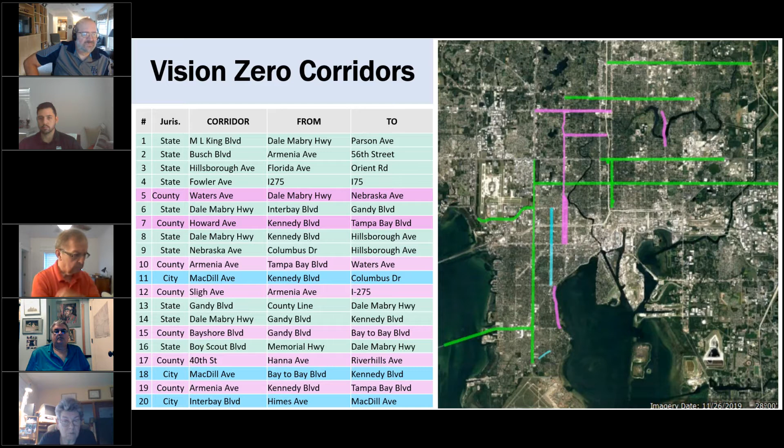Another very important element of pedestrian and bicycle safety we are committing to is a goal of maximum 35 miles per hour on all streets in the city that are not limited access. So with the exception of Interstate 275, Veterans Expressway, and the Selmon, our goal is for every single road to be 35 miles or less. There are not that many of them left because we've been chipping away at them over the years, but that is something we're going to be working towards with the state and the county through incremental changes over time, and also with major projects that will reinforce lower speeds.

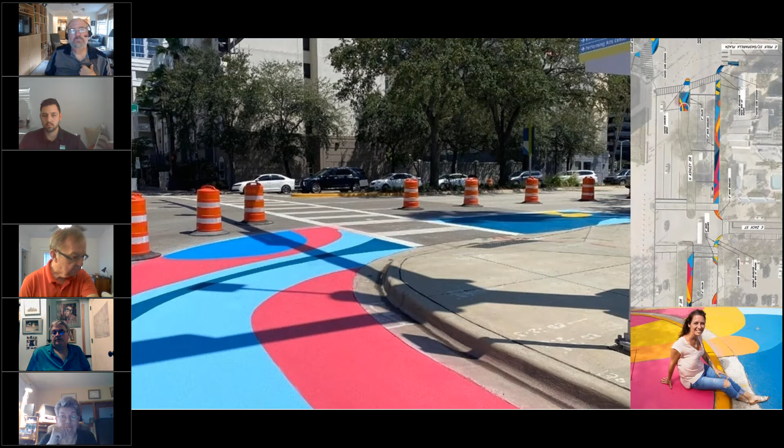For those of you that have been downtown lately, you probably have seen that last week we wrapped up some of the final touches on the painted bulb out project along Ashley Drive. This went all the way from Jackson to Tyler. Unlike a lot of our other art in the right-of-way projects, the premise behind this project was introducing color and texture in the areas where vehicles are not supposed to go. These areas are going to be bounded off by temporary or flexible post delineators to help reinforce the narrowing of the actual roadway space and encourage people to drive more slowly and more cautiously. So this is just a snippet of it, and that's the artist - she's a local downtown artist who came up with the schematic for this.

And of course, our Crosswalks to Classrooms program - 5 locations were implemented and 4 more are planned for this year. A total of 13 painted intersections have been completed, plus the painted curb extensions on Ashley, as well as some other innovative art in the right-of-way projects that we're working on here in the next couple of years.

Another strategy that we've expanded the use of is all-way stop control. We have been very reluctant to do this in the past, but that has now changed. We know that converting 2-way stop control intersections to 4-way stop control intersections can reduce crashes by nearly 70%. So this is going to become a very important Vision Zero tool for us. We already have a 6-month backlog of requests for field review and study to make sure that we're still meeting MUTCD requirements, but this is something you'll see popping up more and more throughout the city.

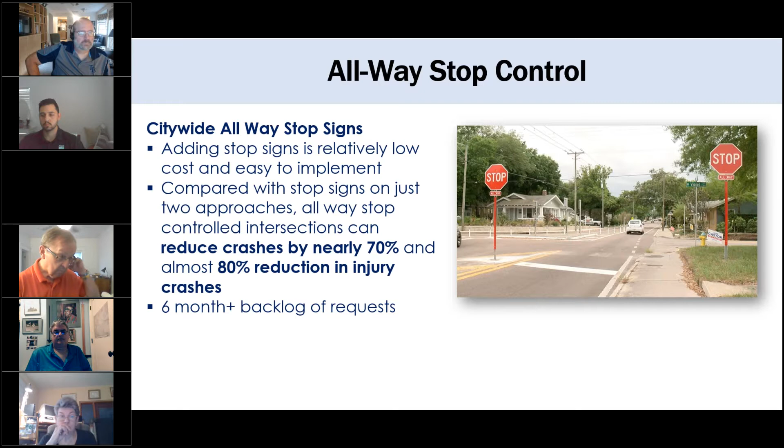And then just a quick snapshot of where we've been. A lot of what the city's been doing in the past has actually been very, very good. We have pursued systematically Vision Zero projects, safety projects on the top crash corridors that the city controls. That's why on that list I showed you earlier, there really are not a lot of city streets left that have not been completely redesigned.

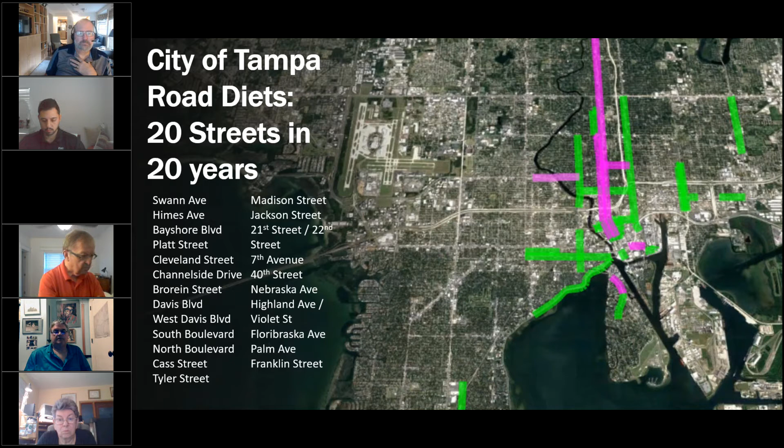Okay, I'm going to talk a little bit about our Greenways and Trails Master Plan, and I'm going to go back in history to 1995. At that time, a group of citizens, a volunteer consultant, and city staff met on a Saturday and looked at the Hillsborough River corridor and started dreaming about what trails could be built that would draw attention to the Hillsborough River. Instead of turning our back on it, let's bring it to the forefront. This was really the city's first attempt at looking at how we could incorporate trails into our community.

From that document, which ended up being kind of controversial because people started thinking that trails were going to go through their backyard, many of you probably remember a few newspaper articles about that. But from that document, we were able to get a grant from the National Park Service, who assisted us with preparing a master plan for the whole community, which was adopted in November of 2000 by Tampa City Council. Since that time, that document has really been the basis for everything we do as far as greenways and trails go.

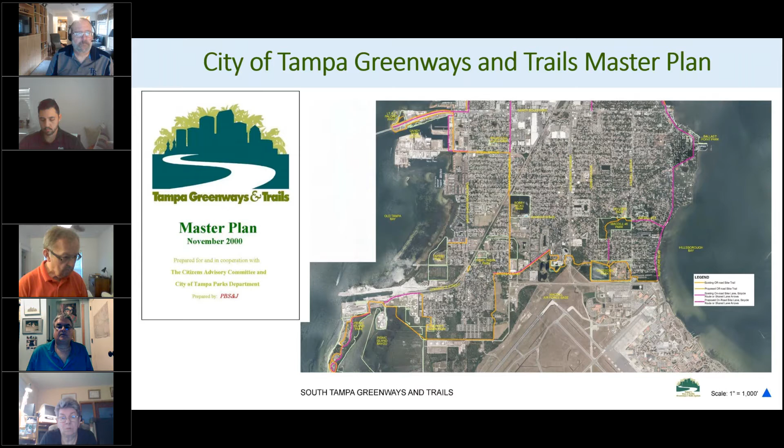Since that time, we've been using that old master plan, and one of the things that Mayor Castor's advisory committee on transportation did was come up with new recommendations on how we can do a better job of incorporating these trails into the rest of our multimodal system. The first recommendation was not just to have the Parks and Recreation Department managing these, but to incorporate it into the city's transportation department. I think that's really important because there are so many new things transportation is doing that it's hard for us to keep up with everything. Having it under one umbrella will really help with the uniformity of the connectivity.

When we started Greenways and Trails in 2000, transportation was not really on board with the whole idea of this connectivity. So it's really nice that in the last few years the importance of off-road trails integrated with on-road has gained importance, and our state transportation department certainly embraces incorporating them into the overall plan. Our maps need to be updated with what our transportation department is currently doing and their future goals, making sure we're looking at it as transportation options, not just for recreation, which I think we've done for the most part, but definitely the two can work together. I think there's a lot more opportunities for funding and grants when you look at these as part of a multimodal plan, and then developing performance goals for the trails and greenways overall as we go forward.

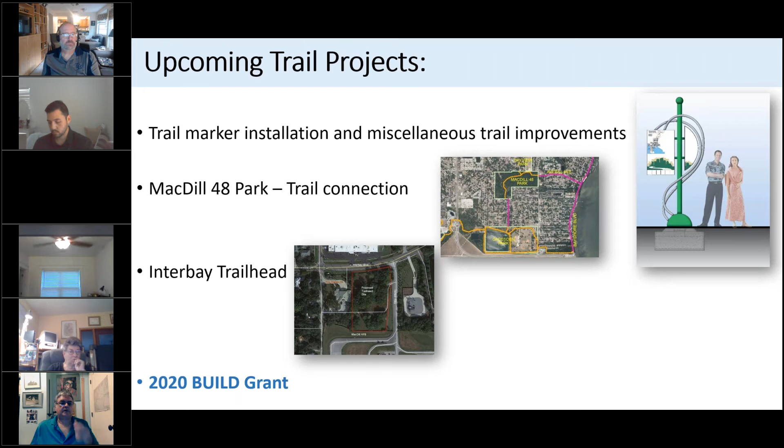Stephen's got a plan that I'm going to walk you guys through. Do you want to do it now, or wait till the end? We can wait till the end, it's in a separate window. Maybe we should wait till the end, I don't want it to go too long. That'll be fine.

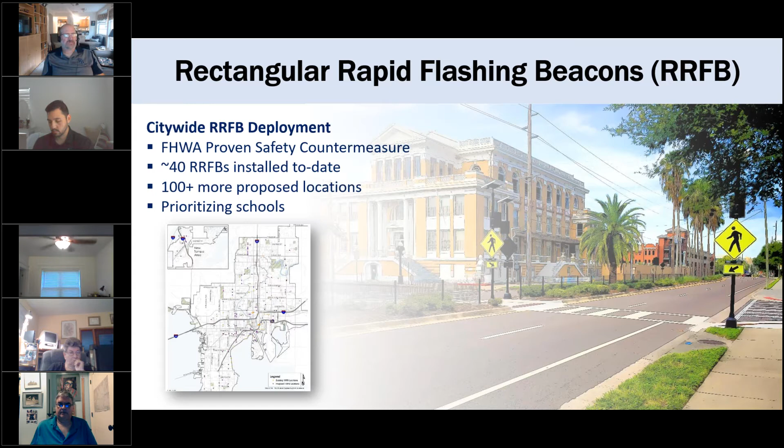We're extremely supportive of the MPO's position on RRFBs. We've installed about 40 at pedestrian crossings throughout the city to date, with 100 more proposed, so we really don't want to see that tool go away. Future locations will be prioritized based on proximity to schools and parks, with other locations installed after that.

We're also taking a step back and looking at the city as a lab, so you'll see different initiatives pop up that incrementally make a difference. This is a sign our staff developed in response to the legislation proposed to eliminate RRFBs, which we hope provides more clarity and caution to pedestrians using the flashing beacons, to make sure they look before stepping into the road. These are incremental changes made as a result of that legislation to address the situation that triggered it.

Other signal initiatives we're working on include deploying more leading pedestrian intervals, giving pedestrians a couple seconds at the beginning of the cycle. These are pretty much universal throughout downtown, and we're slowly expanding into the West Shore District and the university area. We're also expanding LED lighting and converting existing systems to LED, working with TECO and FDOT, and using technology for incident management and predictive crash analysis.

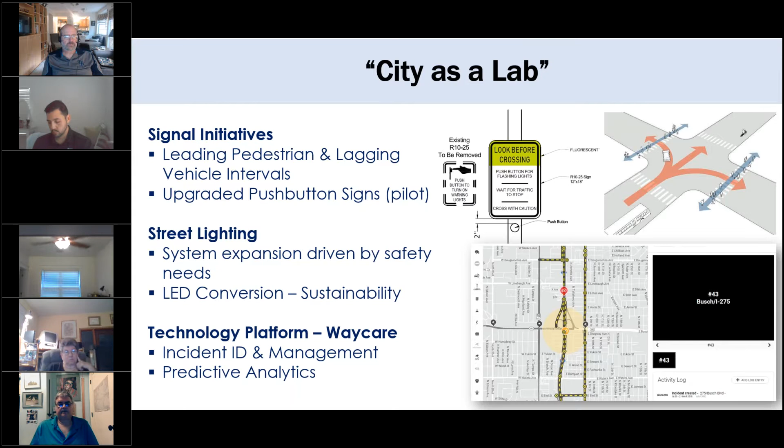Some pilot projects you'll see include our separated bike lane program, where we're looking at buffered bike lanes with space between the striping to install flexible posts. These are locations where we'd like physical separation like a curb, but for whatever reason that solution isn't appropriate there right now. As a stopgap, we're using temporary features to increase both perceived and real safety for cyclists.

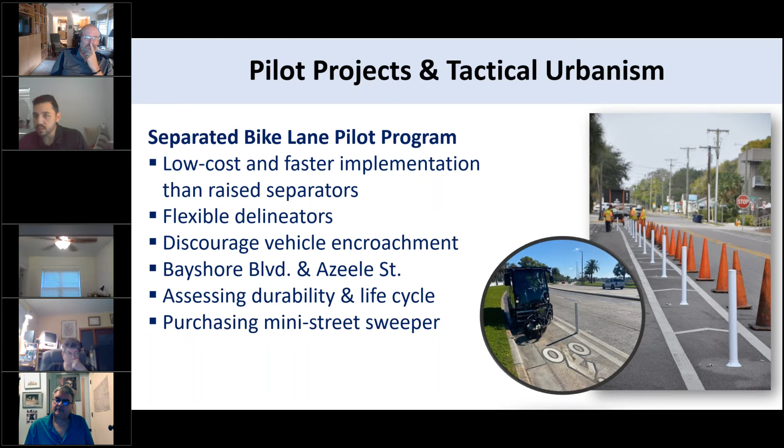We've expanded our bike lane network so much that we put a mini street sweeper in the budget, and it was approved. That purchase should come online before the end of the year, and it'll be used to sweep and maintain the cycle tracks downtown, as well as the protected bike lanes on Bayshore and others throughout the city. That should be great.

As far as transportation capital projects go, I'm not going to go through each one individually, but if you have a question or concern about a project you heard about, we keep our website up to date on all ongoing projects — from corridor and complete street projects, to intersection improvements, resurfacing projects interior to neighborhoods, trails and greenways, capital maintenance projects like bridge rehabilitations and seawall projects, and special projects like the streetcar extension and the West River BUILD grant.

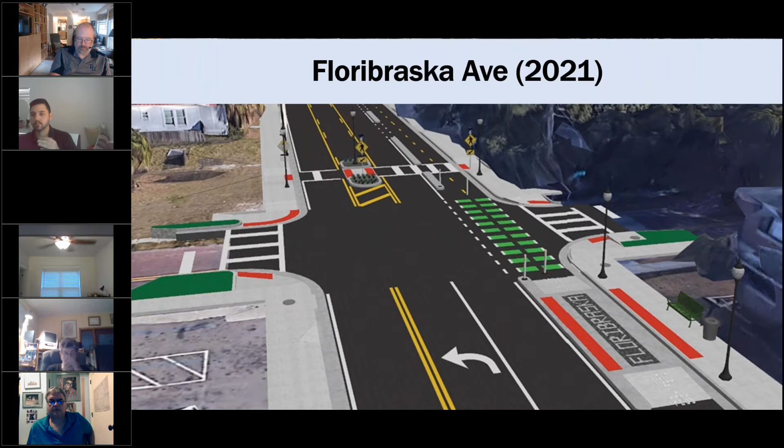So this is the fun part where I get to show you graphics. Some of these you may have seen, but this is an image of the Floribraska Avenue project going to construction early next year, where we're reducing the number of lanes from 4 to 2 and installing a center turn lane and a protected cycle track. The limits of that project are from Florida to Nebraska.

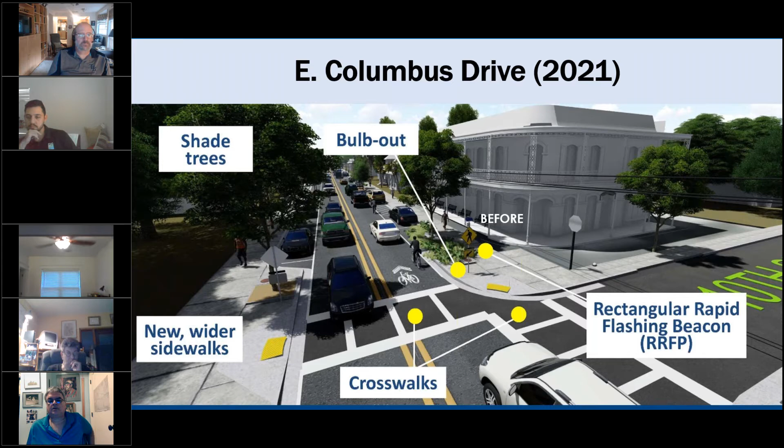Columbus Drive is a very similar project, this one in East Tampa running from Nebraska to 14th. This project is almost a complete reconstruction — you'll see it looks nothing like the previous slide, with pedestrian features like bulb-outs, landscaping areas, all new crosswalks, and crosswalks with rectangular rapid flashing beacons. This is also a 2021 construction project.

A project now wrapping up under construction is our 34th Street Safety Improvement Project. These photos are a little blurry, but you can see before and after — this is the intersection of 34th Street and 21st Avenue in East Tampa. This intersection was converted to a modern roundabout, and two other intersections were also converted.

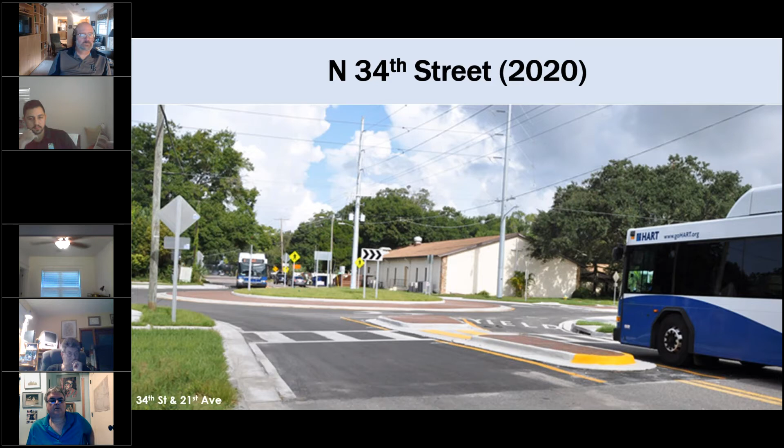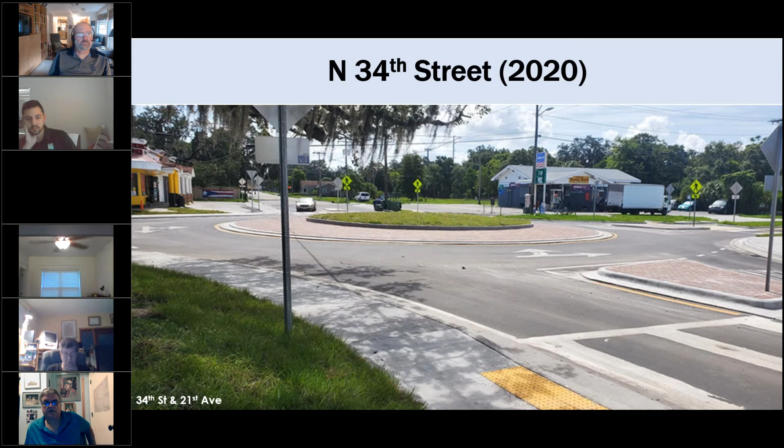As far as capital maintenance goes, we are still figuring out ways to incorporate pedestrian, bicycle, and safety improvements into our capital maintenance projects.

The Brorein Street Bridge has reached the end of its functional life, so we have to perform some major rehabilitation. While we're doing that, we're going to reduce one of the lanes, so instead of 4 lanes it'll only be 3, and we're using that additional space to widen the sidewalks on each side.

If you've ever tried to walk across the Brorein Street Bridge, I take off my hat to you, because it's not an easy thing to do. It's very steep and the sidewalk is very narrow, so this should really improve that connection across the river.

We're also looking to incorporate some of the thematic and aesthetic features of the Riverwalk, like the pedestrian railing and the decorative light features that you can kind of see there.

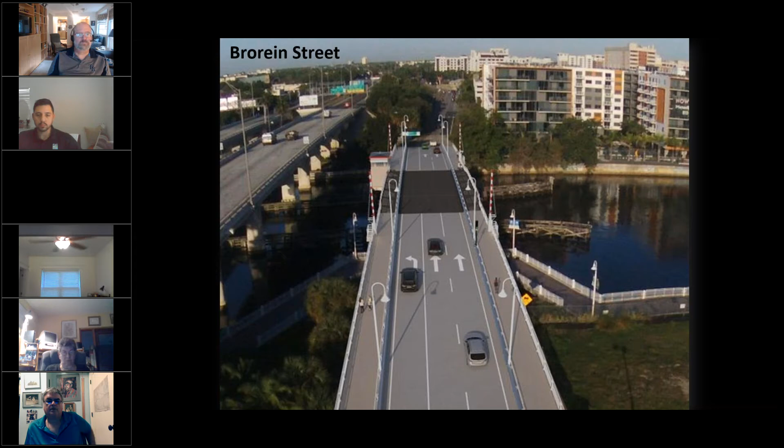And then our downtown corridors - this is the South Core resurfacing project. It involves Tampa Street, Florida Avenue south of Jackson - those are the sections owned by the city - as well as almost all of Brorein Street from Jefferson all the way west to Ashley Drive.

This is just a very blurry graphic, but it's hopefully conveying that we're adding green bike lanes that are buffer protected and placed on the inside of the parking lane. We're hoping those will be more accommodating and inviting to cyclists.

We're also incorporating bike boxes and some of the other green safety features that you see on Jackson Street and Cass Street on these bike lanes as well. You can see this is Tampa Street coming south, and the parking spaces here, but the bike lane's going to be on the inside. That should be really cool.

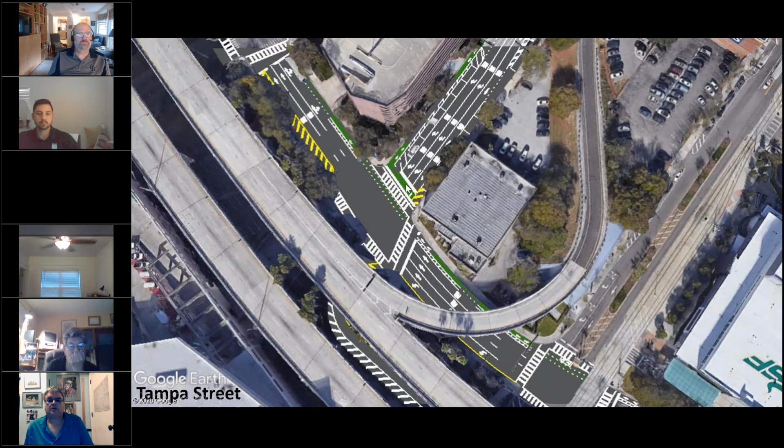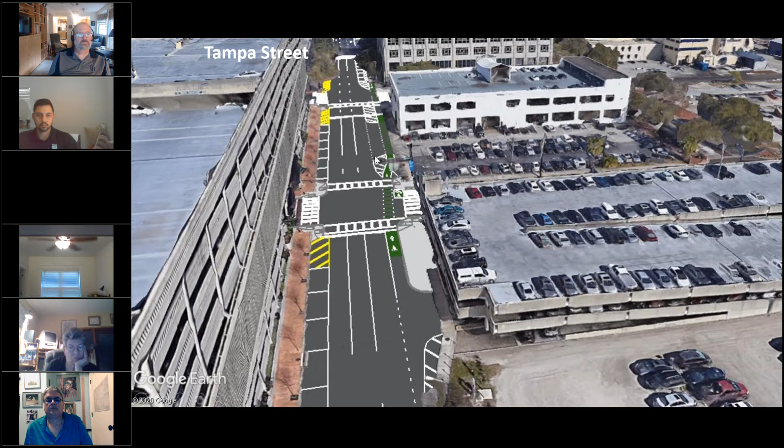This is just another angle looking north. This is Fort Brooke Garage on the left, so you can see how the bike lane will be woven in on the inside of the parking. And that project is going to go to construction, I forgot to say, next year.

The other major component of our capital program is working with the county. There are multiple resurfacing projects going on right now on county roads in the city, and we're working with them on both. North Armenia and North Howard are being resurfaced, and this is the cross section we've proposed - again, bike lanes on the inside of the parking, as well as new pedestrian crossings and RRFBs.

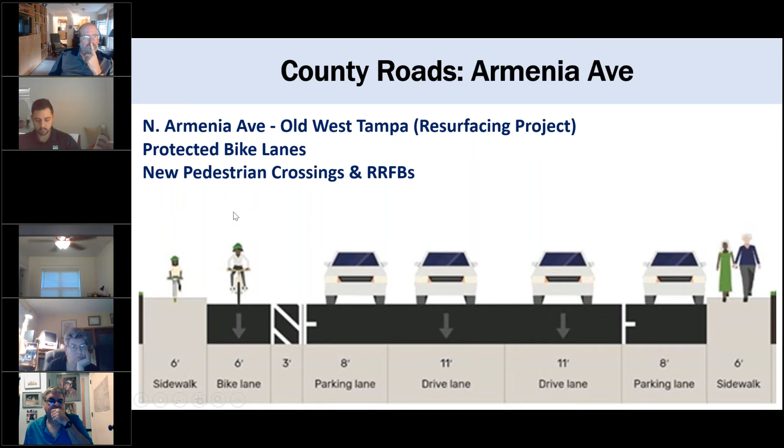For Columbus Drive, the county is resurfacing from Dale Mabry to Nebraska, and we've worked with them to incorporate a road diet from roughly Howard Avenue to North Boulevard. That will allow us to incorporate bike lanes. This is actually a cross section of the bridge, the swing bridge, what it will look like, as well as additional pedestrian crossings along the corridor.

Both of those, Armenia and Columbus, are going to be going to construction in the next, I think, 18 months.

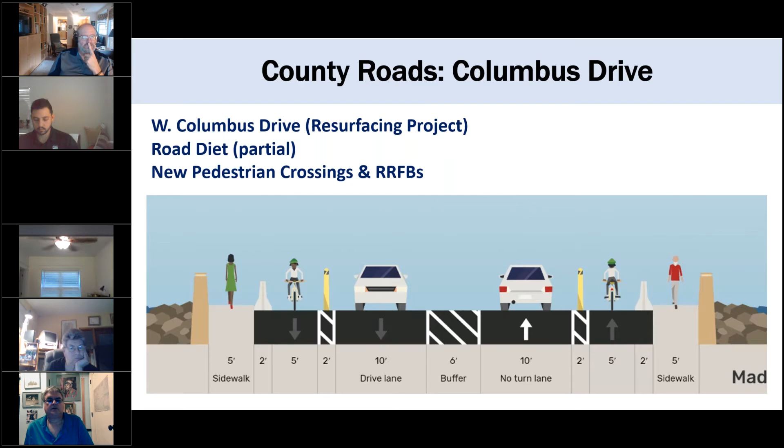And then something that's been moving along quietly in the background, we have 2 segments of the Green Artery that are in production. Segment E, we had a public meeting - I think it was mentioned earlier in this meeting. Design is essentially complete, and we are scheduled to start construction next year.

Segment E, by the way, is the segment over near Lowry Park. Segment D is the segment that basically runs along Park Circle over in the northeast section of Seminole Heights, and that section is scheduled to start design early next year. We already have a consultant on board that's going to be starting work pretty soon.

And then, I think this is my last slide - just want to give a high level update to make sure everyone's aware of where the Green Spine is. Obviously, phase 1, the section through downtown from the river to Nebraska, has been completed. Everything west of the river is currently under construction in some form or fashion.

There's a very, very large Cypress Street outfall project over there. I'm sure a lot of you are aware of it, but that project will be incorporating the remaining elements of the Green Spine, so it'll go all the way to Howard.

And then the only remaining segments that need to be built are the segments east of Nebraska along Nuccio Parkway, and all of those remaining segments have been funded by FDOT, and they're currently in the tentative work program that we expect to see here pretty soon.

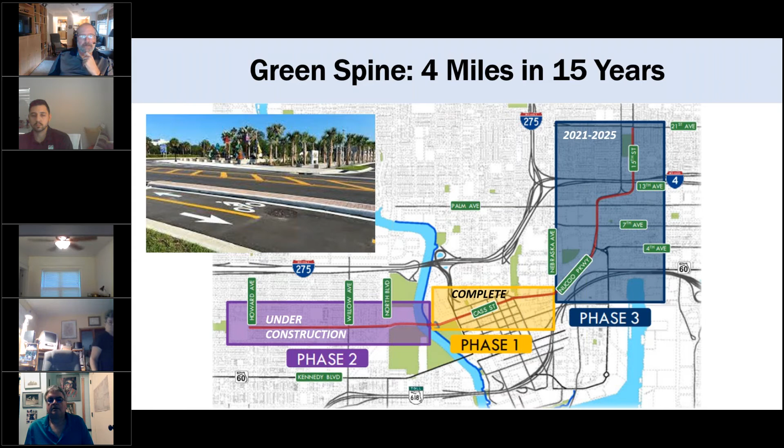So 4 miles in 15 years, but we've come a long way. We want to thank the MPO for all their support in helping us get the grants with FDOT to get this project done. And with that, happy to answer any questions or specifics you might have, but thank you for your time.

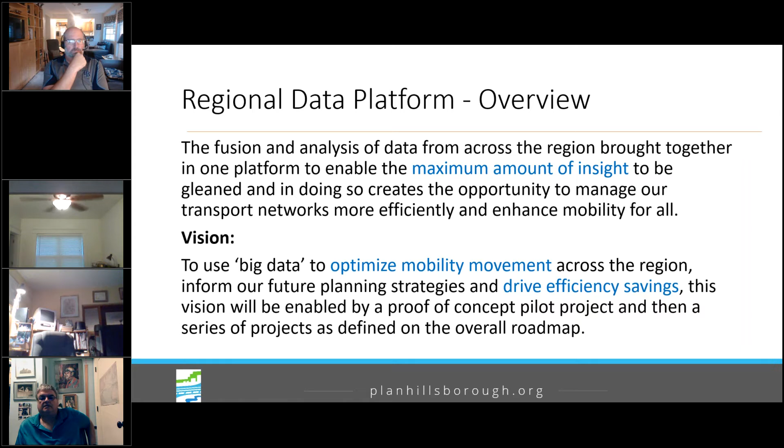The name of the platform is ClearGuide, and that probably doesn't mean too much to some of you not in the planning field, but ClearGuide is an ITERIS product—they're one of the industry leaders in this space. It uses HERE data, provided to us for free by central office. That data can be produced in real time, and it can be binned in very short intervals for operations purposes.

So folks in the traffic management center can see data each minute, 5 minutes, 10 minutes, whatever suits their purpose. And it can be binned across months, a year, or multi-year for planning.

We recently kicked off some additional work to add crash data and Waze incidents. So this is becoming a one-stop shop for all of us, where we can see speed, delay, congestion, crashes, and incidents. It's been really helpful, as you might imagine.

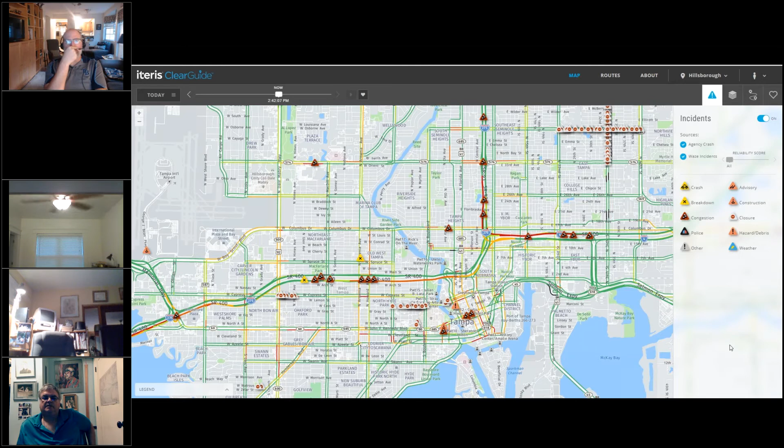You'd be able to see how speed is trending over a 30-day period, or dial it into a 5-minute period if you wished. You can also see things like reliability, location of crashes, and all different types of incidents. And you can adjust the parameters so that you can look at only highly reliable reports of congestion, or only the most reliable reports of potholes, if that's something you're interested in.

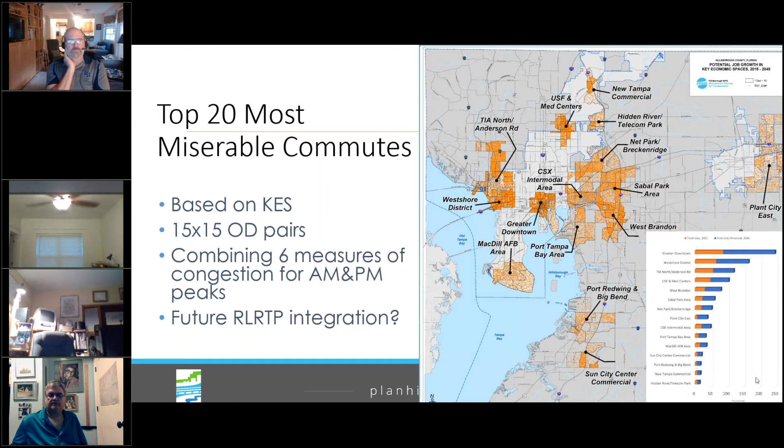We're also able to use this tool as a supplement to traditional corridor level of service analysis. We're working with the county right now, as a matter of fact—the county is updating its comprehensive plan. The mobility element contains level of service analysis, but what we know about our network is that LOS doesn't tell us a whole lot because most of our roads are performing poorly. So we're looking at things like reliability or travel time index as alternatives to LOS, so we can target improvements to the roads most affected by new development.

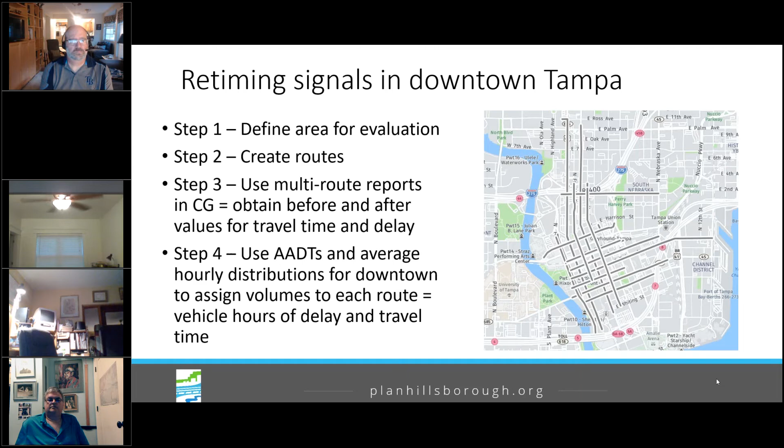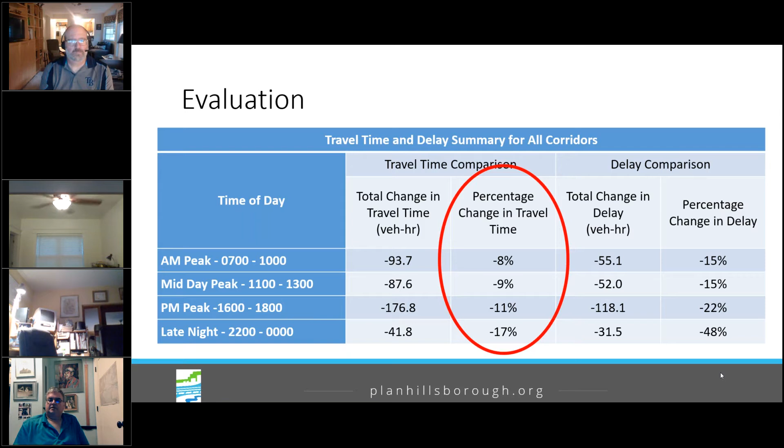Everything I presented you with just now is what's possible today. This is a project that's going to be long-term, and we're developing a roadmap for how to build this out in the future. Every day we get approached by a new vendor that has a new data set that could allow us to produce better insights.

The next steps for us are to incorporate transit data. We want to add in demographic data so we can see what's going on in different communities and how some of our disadvantaged communities compare to others across the county. We would like to get origin destination data. An asterisk alongside OD data would be bike ped data. We're also investigating adding micromobility, so e-scooter and bike share.

We'd like to add dashboards on our website to make this interactive for members of the public, so they can have access to some of these insights if they're curious about how a road near them is performing. And finally, the ultimate build out for this tool would be predictive analytics. We would like to see what the safety impacts would be on a specific corridor if we were to build a bike lane, or install a crosswalk or a rapid flashing beacon. Once we get to that stage, those kinds of insights will be possible with this tool, but it's going to take us some time and resources to get there.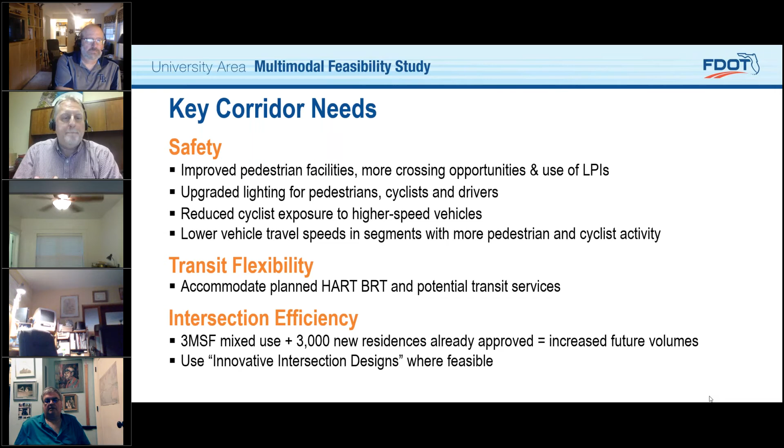So the time frame for action - what kind of time frame are we talking about? Everybody wants to see improvements right away. We know this has been an issue. Being a government agency, we have to put together a work program. Money doesn't grow on trees, as you know. And so we put things into 5-year buckets.

So we've divided the actions up for this into short-term, medium-term, and long-term. What I want to show with this slide is that we're going to be doing things simultaneously, so it isn't necessarily just a linear process. While you're doing some things short-term, we're also preparing for the medium-term - that can include doing the design work, purchasing right-of-way if we need to. And similarly for the medium term, while the minor construction is being done, we can then move forward into whatever planning and design work we need, and purchasing right-of-way, for the longer term needs.

So short-term actions - this has a little bit of animation, so you need to click a couple times there for me. There we go. So we've got 5 different intersections, primarily 4 of them in the western segment of the corridor, that are going to be full-on intersection improvements, and Alex is going to talk a little bit about that. We have another 5 where we're talking about implementing leading pedestrian intervals, a signal timing scheme which helps pedestrian safety, and then there's one more.

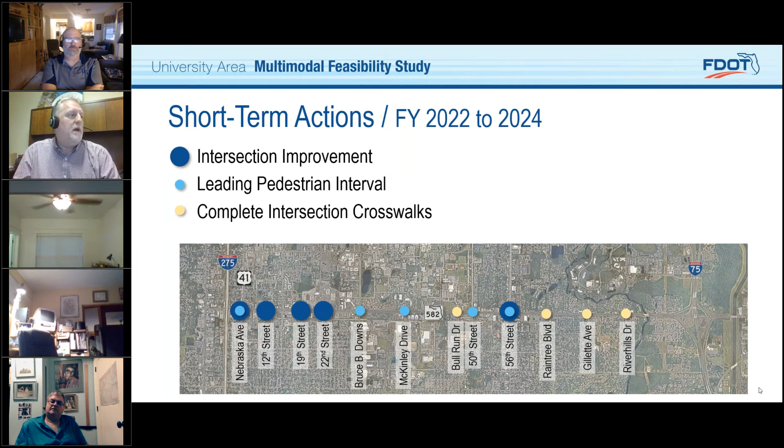As Ken mentioned, in addition to the bigger picture corridor study we've been doing along the corridor, trying to identify what that future vision and typical section looks like, we also wanted to look for opportunities throughout Fowler Avenue to identify some quick-hit safety items that we can move forward in advance of the larger project, making an immediate safety impact along the corridor while staying consistent with the longer-term concepts we'll present in a couple of slides.

So we did a deep dive of all the crash data along the corridor, and we did bicycle and pedestrian counts all along the corridor to see where folks are crossing. One thing that really jumped out is that we saw our largest concentrations of crossings, and also our largest concentrations of crashes, at a lot of the signalized intersections along the corridor.

So we really saw making some geometric improvements to several of the signalized intersections along Fowler Avenue as something we could do relatively quickly. It didn't require a lot of additional traffic analysis, so it's something we could pretty easily get internal buy-off on and program a project to go out there and make some quick improvements.

I'll quickly walk through some of the concepts of the intersection improvements we're making. All of these are set to be bundled into a low-bid design-build project, so we'll bring on one contractor that manages both the design and construction, which lets us advance them sooner. It's funded for this fiscal year and should hopefully start work in spring of 2021, so we're moving pretty quickly on this.

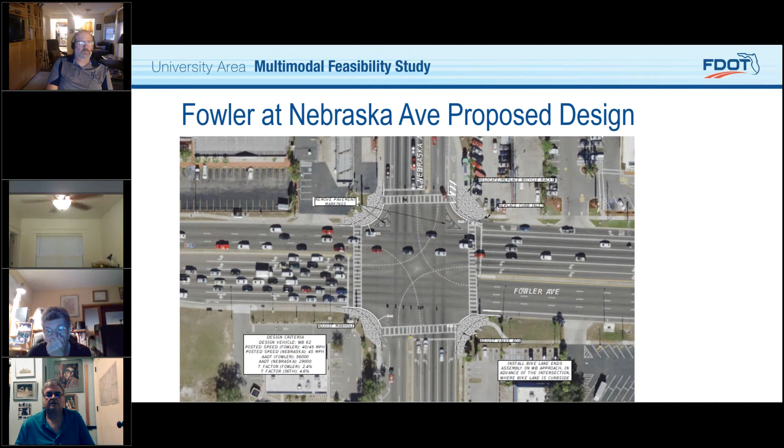Next slide — Fowler at 15th, which is the next signalized intersection to the east. Next slide.

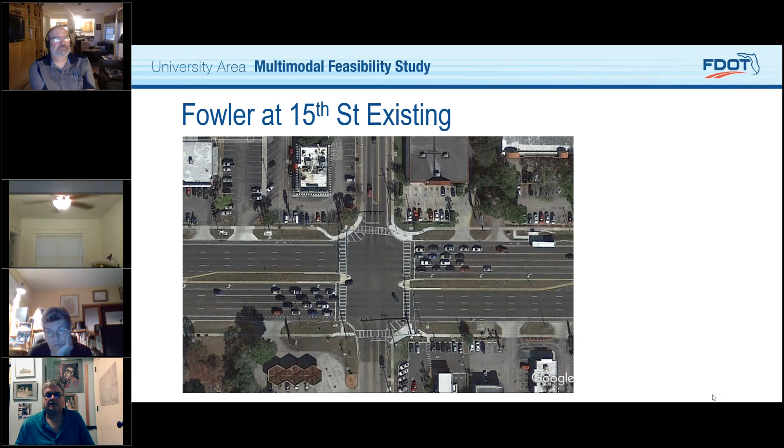You can see we're making some similar improvements. Currently there are gored-out striped areas on the curves at the northwest and southeast sides, which we're formalizing a bit by pulling in the curb to again encourage lower turning speeds and reduce crossing distances. Next slide.

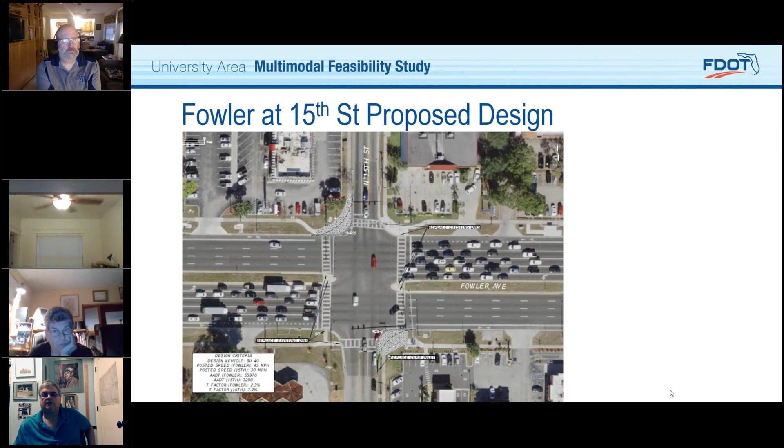Fowler at 22nd, further to the east, looking at similar types of improvements, which we'll see if we go to the next slide.

Again, we're looking for opportunities to bulb out the curbs where we have the room, and also extending the median noses into the intersection to provide pedestrian refuge for folks crossing Fowler — helping break up that crossing and giving folks a place to wait if they get caught crossing toward the end of the pedestrian cycle. In a lot of intersections we can't apply this treatment because of turning templates — it's too tight to accommodate left turns — but in this situation we could, so we took advantage of that space to carve out room for pedestrians to wait. Next slide, please.

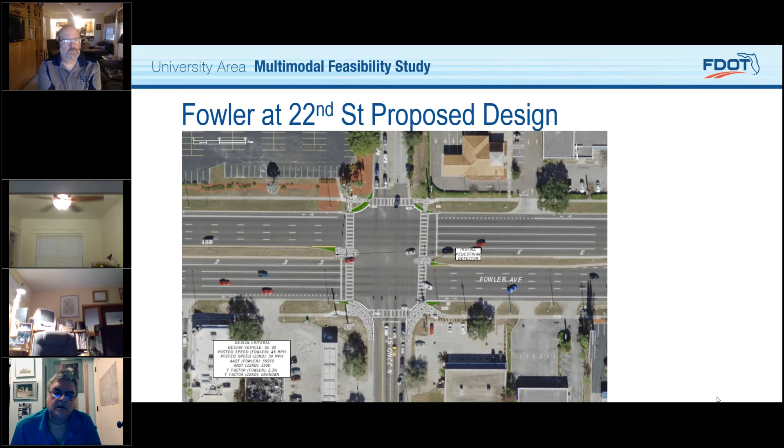This design is good because it helps break up the crossing for the pedestrian into different stages and separates the turning conflicts of the right turns. However, national best practice has shown that the design can be problematic sometimes, as it encourages higher speeds for folks coming around the right turn lanes, limits the visibility drivers have of pedestrians, and serves as a challenge for vehicular safety, since the approach angle requires drivers merging into traffic to turn their head all the way around to oncoming traffic, which I think we've all had the displeasure of doing.

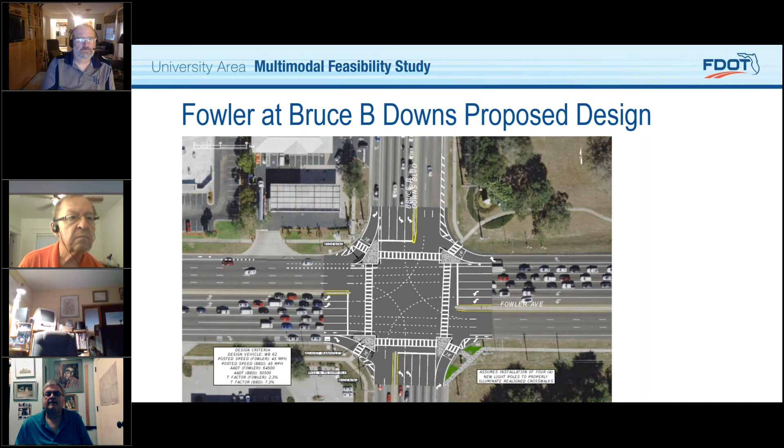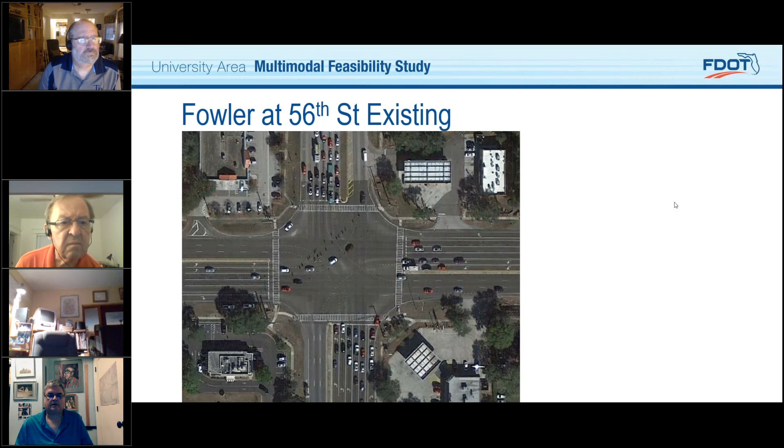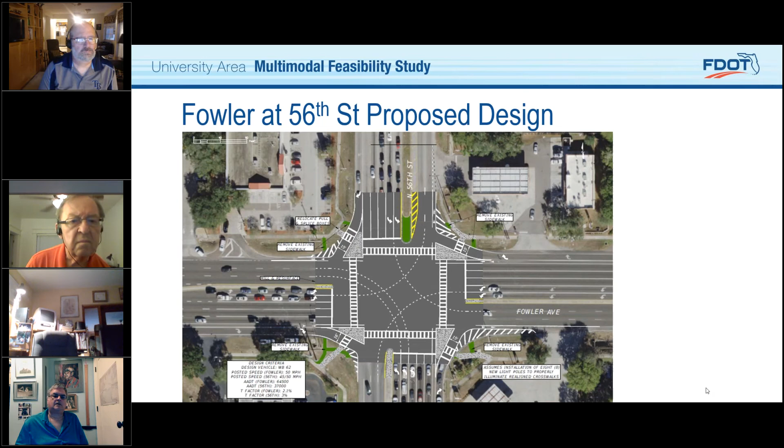As you can see, installing these islands has really given us the opportunity to shrink the intersection down quite a bit. On the north side, we were able to extend that median nose a couple car lengths forward, bring up the stop line, and shrink the footprint of the intersection, reducing pretty significantly the distance pedestrians need to cross, while also implementing urban smart channel type designs that make it safer for pedestrians crossing those right turn lanes, and encourage slower speeds and safer operations for vehicles as well.

Before I hand it back off to Ken, I just wanted to highlight a few other shorter term improvements that we have in the pipeline.

As Ken mentioned, we are analyzing leading pedestrian intervals at all of the signalized intersections along the corridor. In fact, our traffic operations office is doing a district-wide screening of all of our high crash bicycle and pedestrian corridors right now. Our leadership is really encouraging us to be proactive and implement these in as many locations as we can, as they've been proven to be a pretty effective safety countermeasure.

Lighting is another thing Ken mentioned that we've been able to get programmed and moving ahead with. In partnership with TECO and the city, we will be retrofitting all of the lighting at the existing traffic signals with LED lighting as part of our district-wide lighting retrofit initiative, and that work is anticipated to be completed this fall.

And then we've also included a retrofit of all of the corridor lighting, so all the lighting in between the signalized intersections along the corridor, and that is programmed for construction in our fiscal year 24. So if you have any questions about any of the concepts we've shown, we can answer those at the end of the presentation. But for now, I'll hand it back over to Ken.

Thanks. All right, thanks, Alex. So let's talk a little bit about the proposed implementation schedule, because as I mentioned, in those 5-year chunks, what we're looking at was specifically what Alex mentioned is happening in the first 5 years. So if you go ahead and hit a click there, I think we have an arrow that comes out of the side there. There we go.

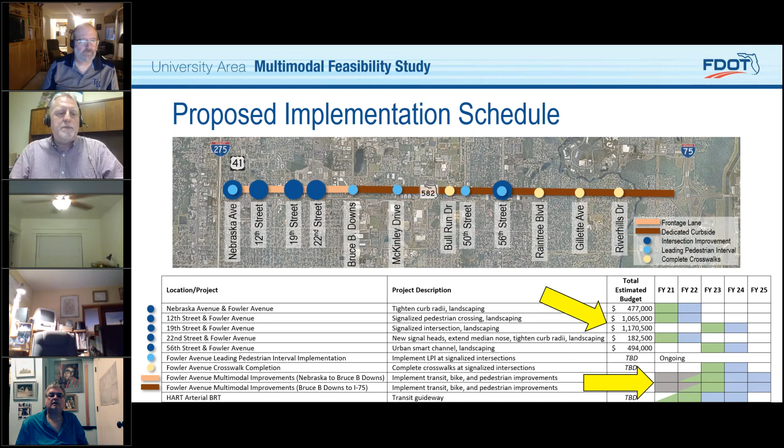So the PD&E will start again this fiscal year and then into the next fiscal year, and then design would follow in FY23 with some of the construction currently scheduled to be in FY24. Next, please.

The 3 different concepts are a BAT lane, business access and transit lane, which we'll see a picture of, and that basically allows non-transit vehicles to use the right lane. So it's not exactly an exclusive bus lane, it's a shared bus lane. That's usually considered minor to major construction, a medium-term action. A frontage lane design, which would be an access lane along the side of the main roadway, and they're separated. That would allow a curbside bus-only lane. That's also minor to major construction, and that's considered a medium-term action.

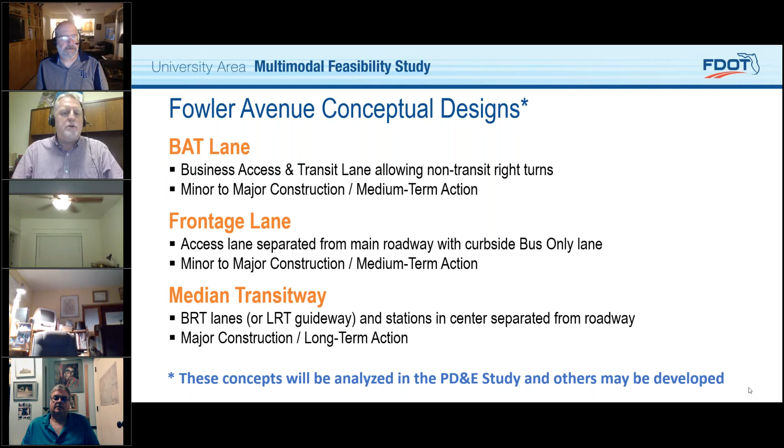And then the longer-term action is a median transit way. So that would be bus rapid transit lanes, possibly transitioning to light rail transit guideway area with stations in the center, separated from the roadway. That's a major construction, as I mentioned, and that's more of a long-term action. So let's take a look at those pictures.

So you know, HART might be able to provide bike racks and other types of things that would help with interaction between bus riders and cyclists transferring over to the transit service.

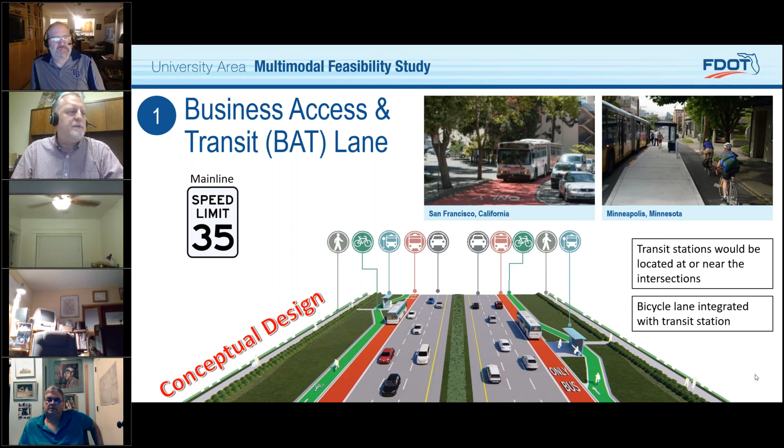They're going to be very interested in how they continue to get access to the road. Between the frontage and mainline roads, you have these kind of slip roads in between. Now, these are not like ramps off the interstate. This is at grade, and they would not necessarily have to be high speed. You're only going from 25 to 35 when you shift between the frontage and the main line.

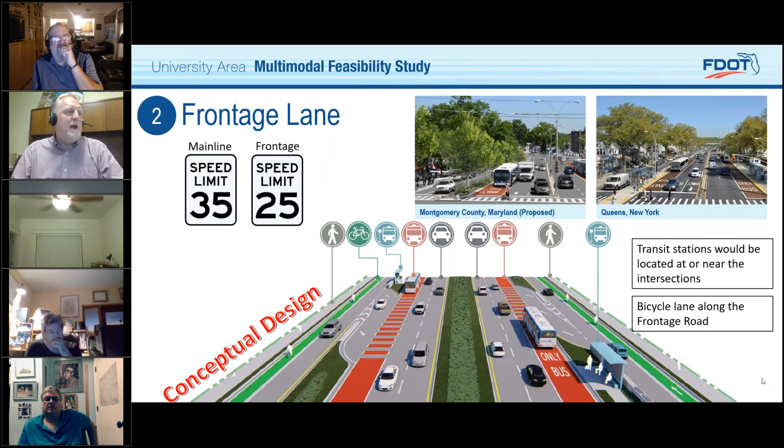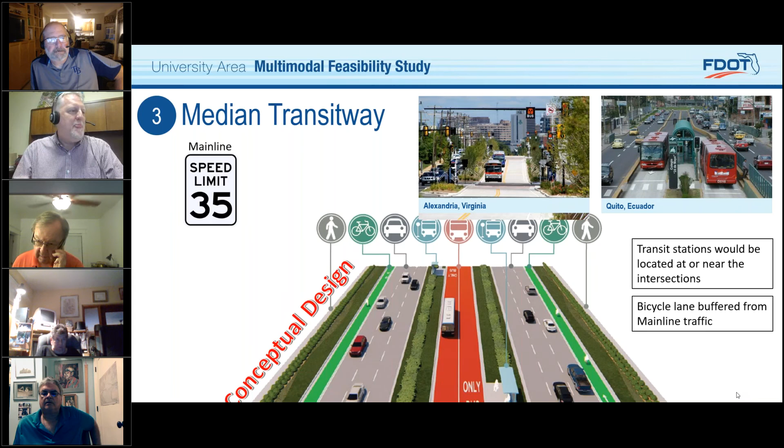Let's talk a moment, unless there's someone here from HART. I don't know if there is anybody from HART on here, but yeah, you need to click one more time.

Their planning process was going on at the same time ours was, so neither one of us wanted to hold up the other. So they were first, they got a head start on us. This is what their initial plan is for what I guess I would call the short term.

So this would be the BRT concept, although they do show a median guideway. Again, this shows the roadway with 35 miles an hour, three lanes in each direction. The stations and bus lanes would be very similar to the earlier median transit way I showed, but they're showing the stations dead center instead of along the sides of that guideway. Also, instead of separated sidewalks and bike lanes, they're showing a shared use path.

Again, this will get looked at during the PD&E phase. And you can see on the map below where they're proposing this, between Nebraska and Bruce B. Downs. It doesn't really affect the rest of the area that we looked at, all the way east to I-75. So I believe that's the last slide.

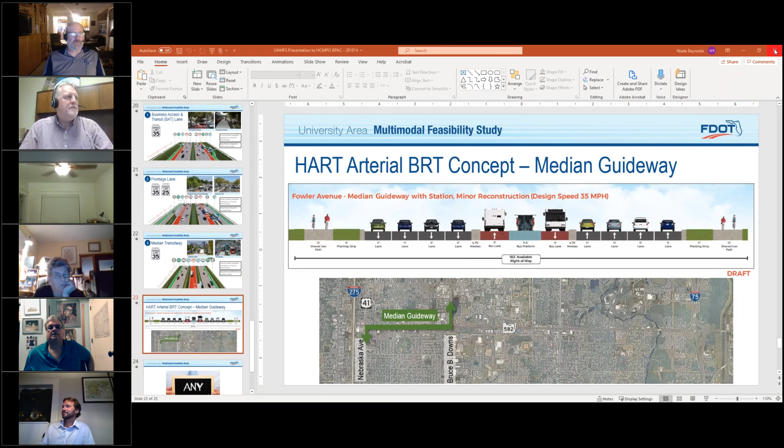All righty, any other questions or comments here for Ken or Alex? Everybody's sold, this is great. Well, thank you very much. All three of them look pretty cool. I'm sure going to be a welcome change. Well, thank you all for the opportunity to present to you tonight.

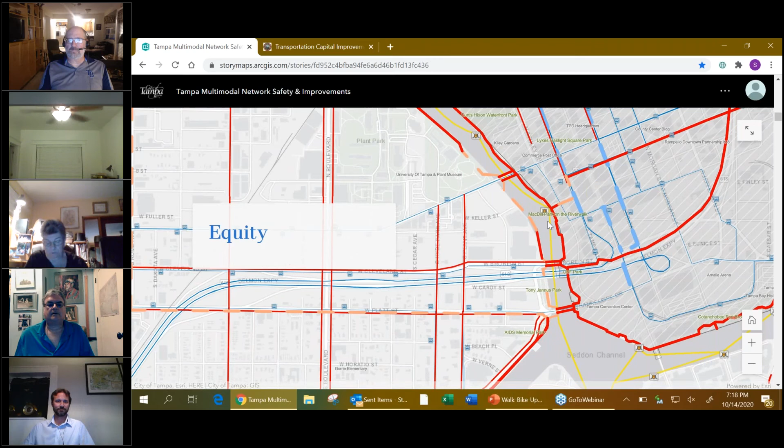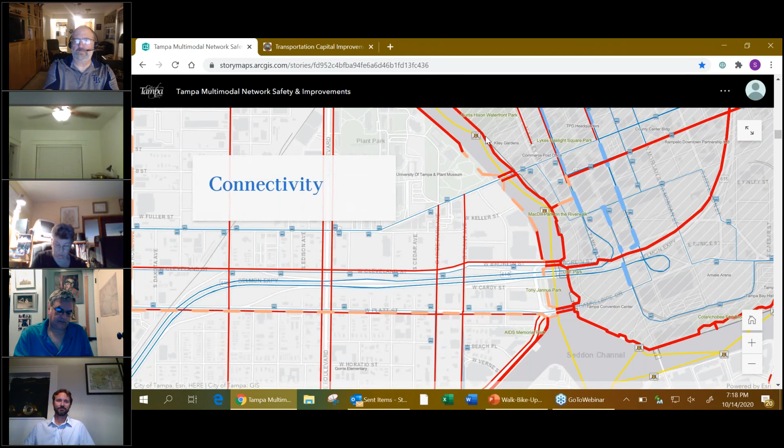Okay, can y'all see this? Yes, looks good. So we received a $24 million grant. It's called a BUILD grant, similar to the TIGER grant - that's what it used to be called. The city's matching it with $6 million. So we're looking at $30 million worth of work that's really going to focus on building new and improving the existing bicycle and pedestrian infrastructure, mostly on the west side of the river, but also looking at some connections into the Riverwalk on the east side as well.

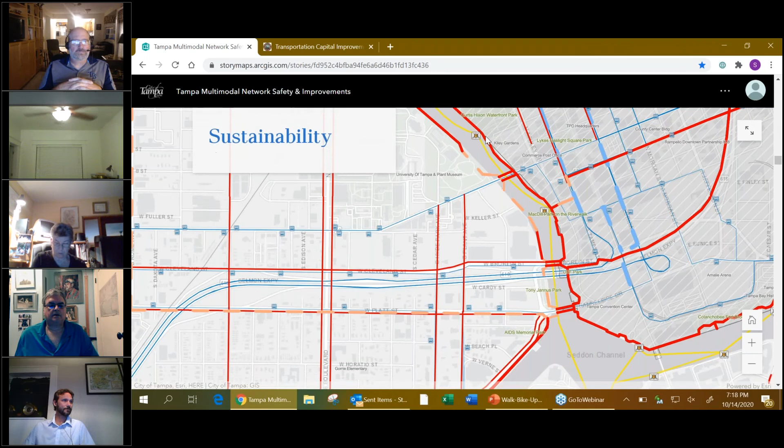These are the different criteria that are part of the grant, looking at sustainability and resiliency. This area is actually the south end of the project area, which starts at Platt Street and goes all the way up to Columbus and then across. This is Tony Jannus Park on the south - you can see the orange line there at Platt Street. So we're proposing an underpass over-water connection from Tony Jannus Park to Bayshore, continuing with improvements to the existing sidewalks in Tony Jannus Park and connecting under Brorein Street.

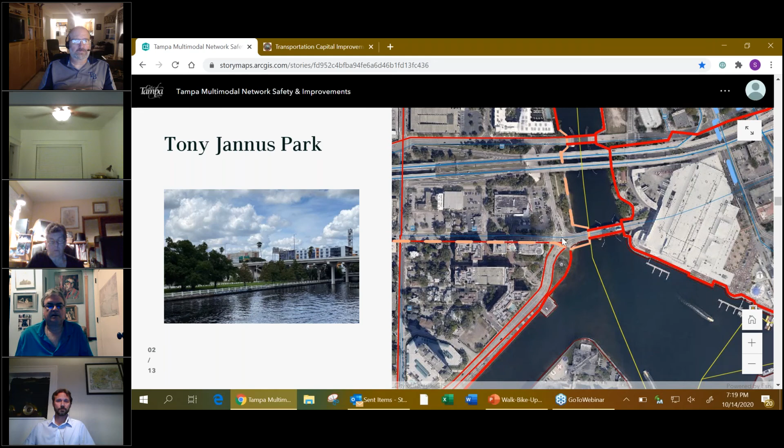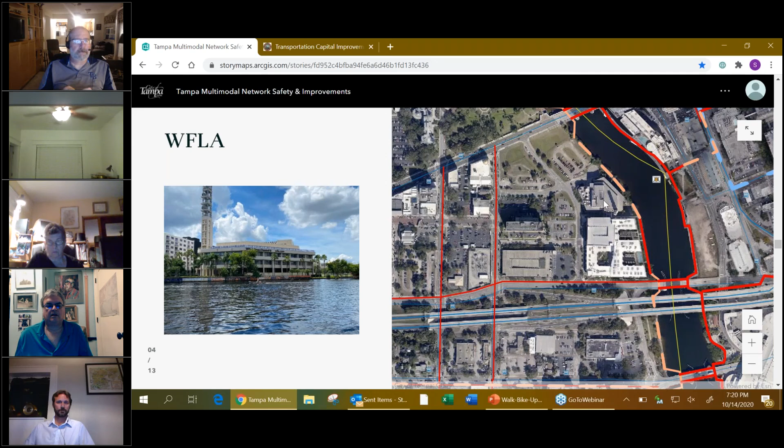The red line there is an existing Riverwalk connection that was built with the Manor Street apartment complex, so we would connect into that existing facility. Picking up north of the Manor Street project is the WFLA project and property. They have within their development agreement a requirement to build that section of Greenway on their property, as does the property to the north, which is known as Lafayette Place.

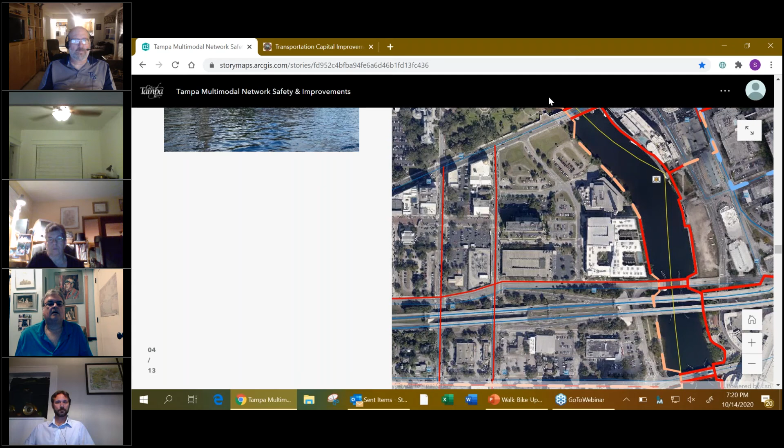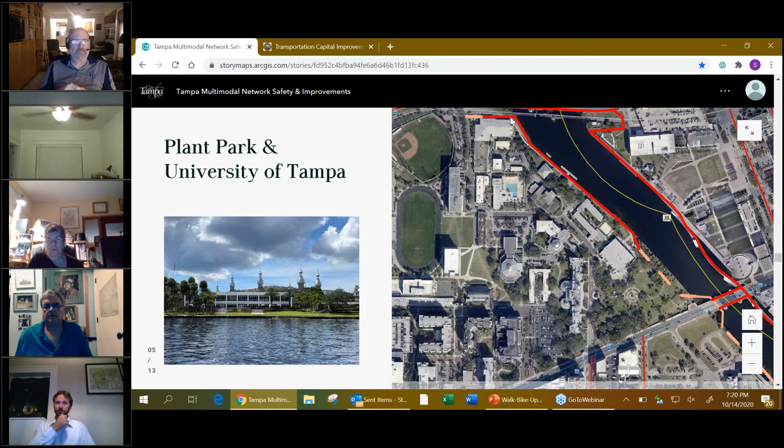Lafayette Place will make a connection under Kennedy Boulevard over water, and then tie in with the University of Tampa and Plant Park, which you see the orange or peach color line again. The red line along the river at the University of Tampa is a trail connection that was completed in 2016 by the city of Tampa. It ends up at the north end or north entrance to the University of Tampa at Cass Street.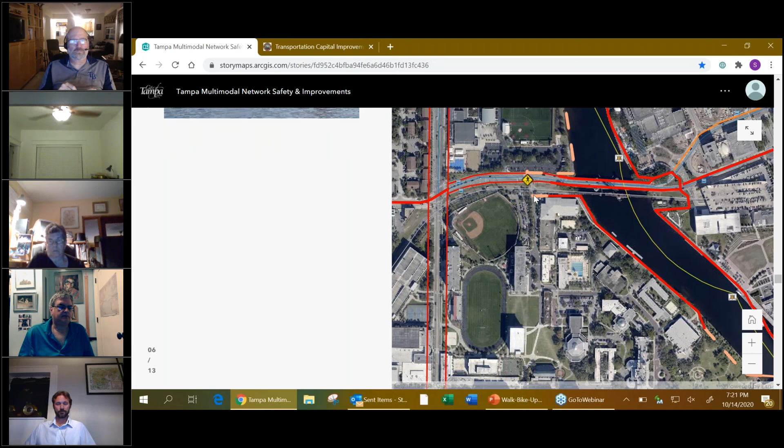One of the things we're looking at is how to make a better connection as you leave the University of Tampa and cross the railroad track there. Right now we didn't really address that crossing because working with CSX is a long process, but that's something we want to address in this project. There's an existing crossing with rapid flashing beacons there, and that will connect us over to Tampa Preparatory School. We have an easement behind the school, and we actually have construction drawings for that segment, so it may be one of the first ones that we build.

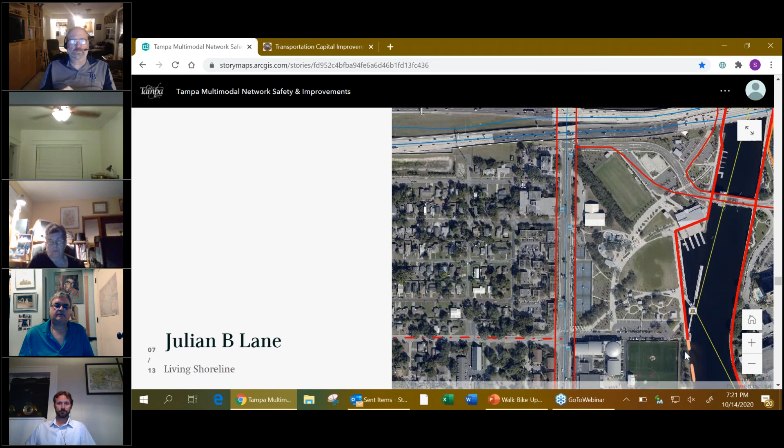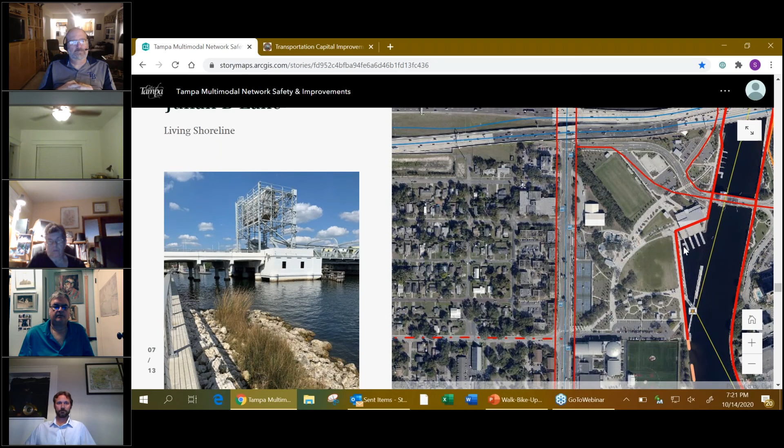So the trail behind Tampa Prep would connect in with the existing Julian B. Lane Riverfront Park and the sidewalk there. One of the things this grant is also going to pay for is the living shoreline improvements. So we're also looking at the health of the river, which was, I think, part of our resiliency requirements within this grant.

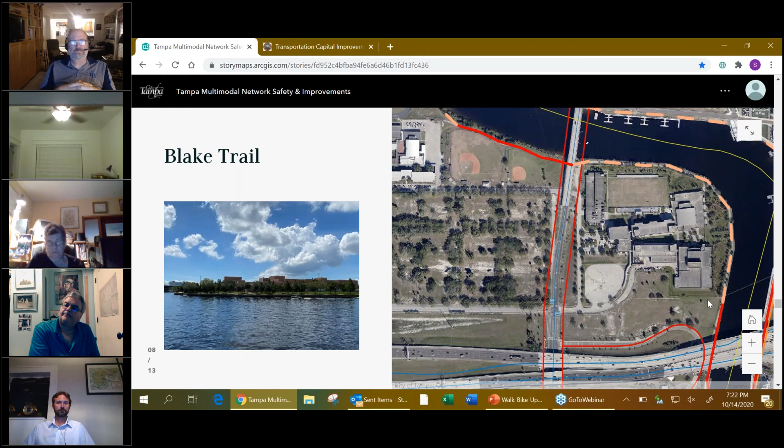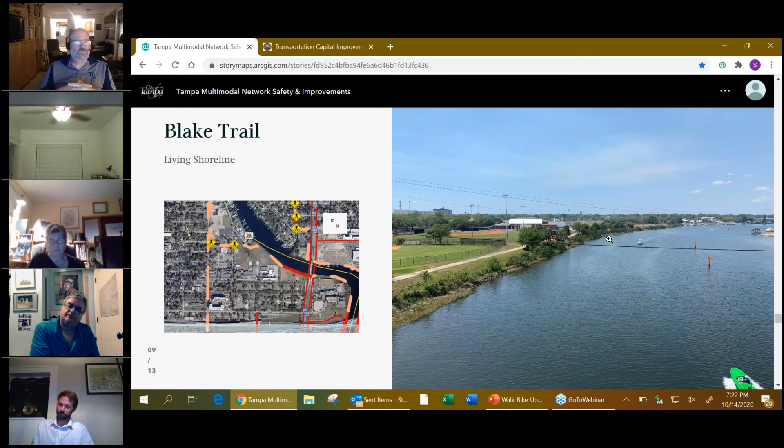There's an existing trail connection underneath North Boulevard behind Stewart Middle School, which is in good shape. So we would pick up behind Stewart Middle School. Here's a picture of that existing trail. The shoreline was also a SWFWMD improvement project, so it has a conservation easement over it, which we would respect with our improvements.

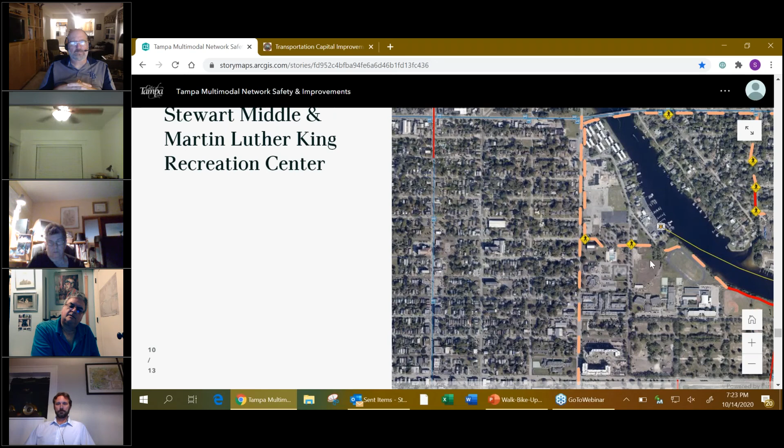But then we would continue behind Stewart Middle School and turn the project to tie into our Martin Luther King Recreation Complex. Again, this is all off-road trail, and as we cut through Martin Luther King Center, we would tie in with Rome Avenue. So part of the project is also looking at complete streets on Platt Street and on Rome Avenue. That would help again with our overall multimodal goal of this area.

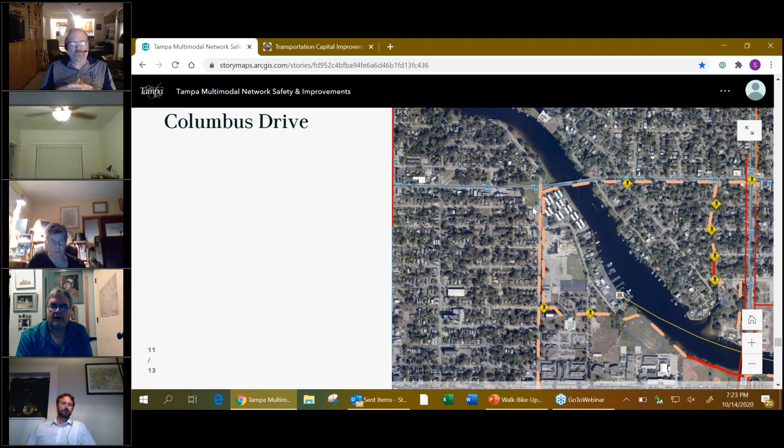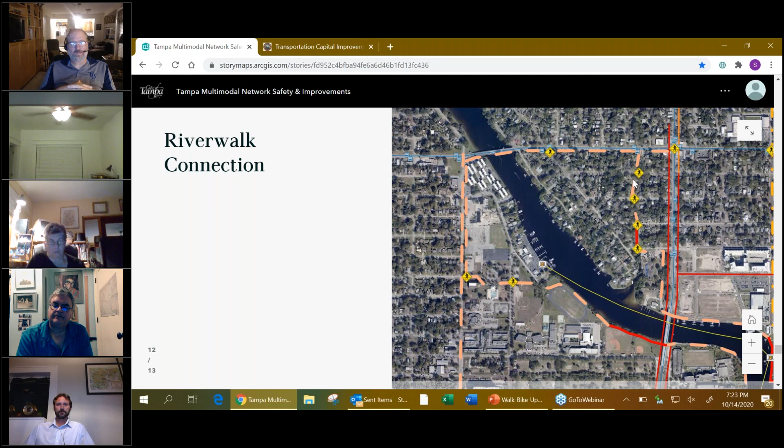As our trail continues along Rome Avenue up to Columbus, Stephen showed you previously what the plans are for Columbus, to include a wide sidewalk on each side as well as bicycle facilities. That'll get us across Columbus into the Ridgewood Park neighborhood and Glenwood Avenue, which runs through the middle of that neighborhood. They have a wide median that the trail would continue through down to Ross Avenue, across Ross, down on the west side of North Boulevard, and tie into the Riverwalk at Armature Works.

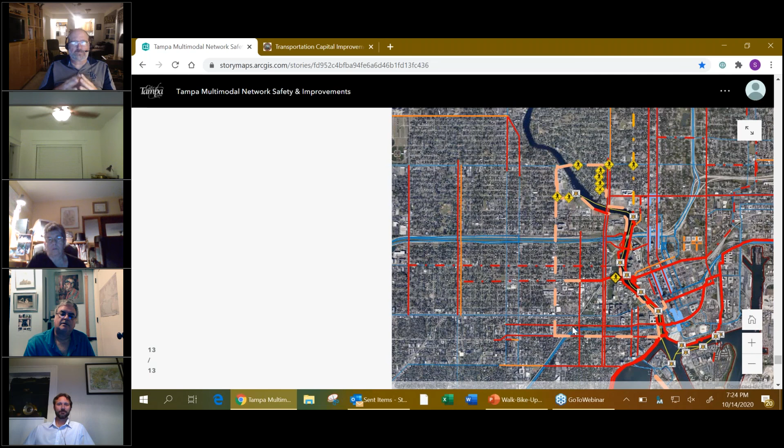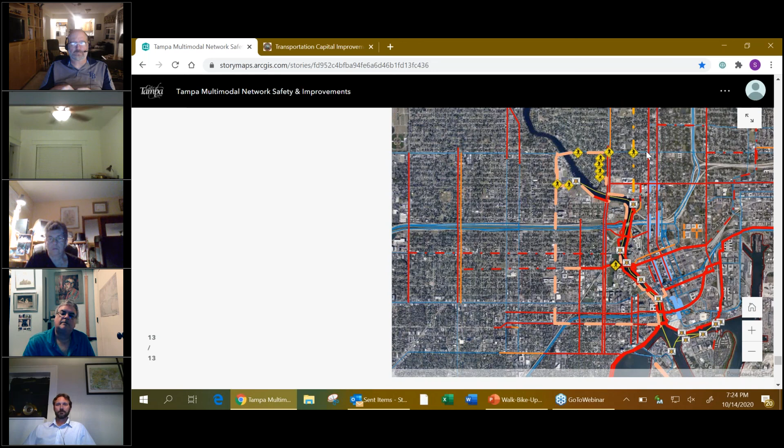So that's the project in a very quick nutshell. It includes multimodal paths, complete streets on Rome and Platt, overwater underpasses at Platt Street and Brorein, enhanced crossings at Stewart Middle School, Martin Luther King Center, the CSX crossing at University of Tampa, and our Riverwalk connection, as well as our living shoreline projects. All of this has to be completed in 7 years, so we have a pretty tight time frame to get all of this done. I'm sure we'll be coming back to you with more details on each of these sections as we get into the nitty-gritty of design.

Any questions? I know that was very quick. Sorry, Stephen, if I was talking faster than you were scrolling. But it's going to be a great project, and we're really excited about it.

Are there any questions on this project here, guys? This is Wanda. I have a question for Stephen because I had initially asked him about it through Wade. Traffic right now in the Armature Works area is insane, and if we're going to be bringing more pedestrians and bicycles and people down there, what are the plans around some sort of control of that area?

Yeah, I think we talked earlier about some of the cut through traffic on Ross, right? Yes, we did. So we have added that to the queue for locations to put into all-way stop controls, like I mentioned earlier. We're going to be looking at doing more of those.

Our list, I think I mentioned briefly, is about 6 months long. I was told it's not going to take 6 months to get yours in. But I'll follow up with you separately once we get a better idea of timing. That is in the works, and it is moving. We're just chipping away at it. Sounds good. Thank you.

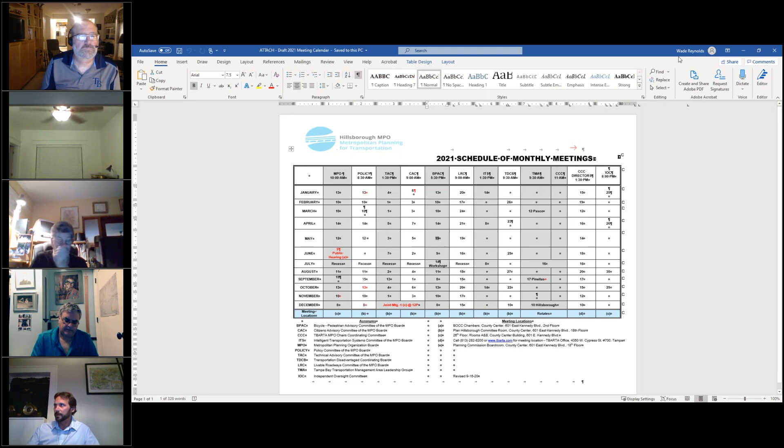I can pull up last year's calendar here for you. In May, it was May 13th and June 17th before. Now it is May 19th and June 9th. So it's sort of swapping, one is a week earlier, one's a week later. But we will be bringing this back to you for approval. I just wanted to make sure that didn't set off any red flags with anyone.

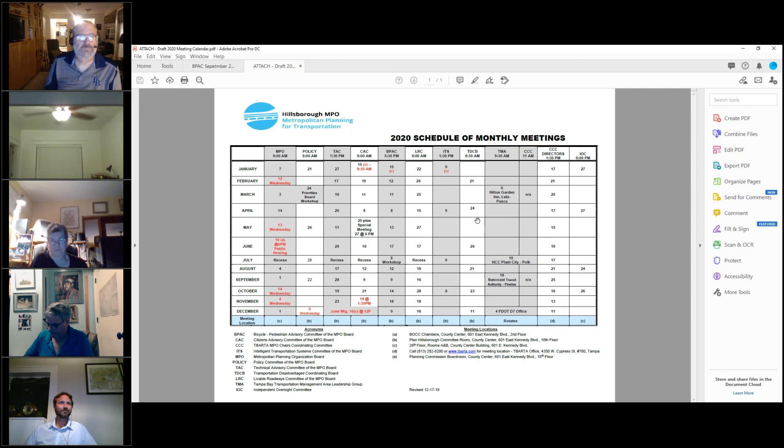And I hope it doesn't. All righty, thank you, Wade.

Next item on the maintenance issues discussion. I was hoping Mr. Davitt might be here for an issue we had been discussing on Harney Road. I know there had been some response. Do you have any news on that or update? Not on Harney. I think Peter's on vacation right now.

Just in the broader context, I want to let you know that we're putting together something to bring back to you. I have some great info from the city of Tampa and working to get the same from FDOT and Hillsborough County so we can compare, and then looking at some other cities and what they're doing to address some of these issues proactively.

And I was pleased to see in Stephen's presentation some of those, the small street sweeper and the other items y'all are looking at. Yes, and I think I'd like to emphasize that we would like that invitation for the christening ceremony of the mini street sweeper. I definitely think so. Very excited about that.

And then lastly, the virtual and hybrid meeting discussion. So at the end of this month, the emergency order does run out. And at that time, several committees and the board and our elected bodies will have to go back to having an in-person quorum.